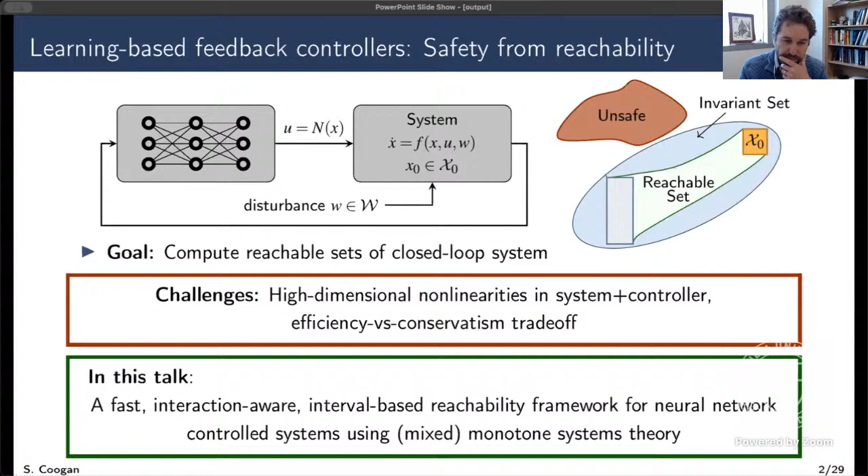This is a hardware platform in a collaborator, Panagiotis Tsiotras's lab here at Georgia Tech. This is a spacecraft mounted on a hemispherical ball joint, a very low friction hemispherical ball joint. It's actuated by air thrusters that rotate this spacecraft. The challenge here is that it's got very low actuation capabilities—the amount of force that can be applied to the system is very low. So to get the system to slow down and change direction takes quite a bit of time.

So we mounted a green laser pointer on top of the spacecraft. The safety specification is pretty simple to state in this case: you just don't want the spacecraft to ever point in the direction of the sun.

But it's quite difficult to anticipate where the spacecraft could go. If you have too much momentum and you're rotating, you may not have enough time to slow down before you violate the safety specification. So what we're doing in this experiment is constantly computing reachable sets of the system.

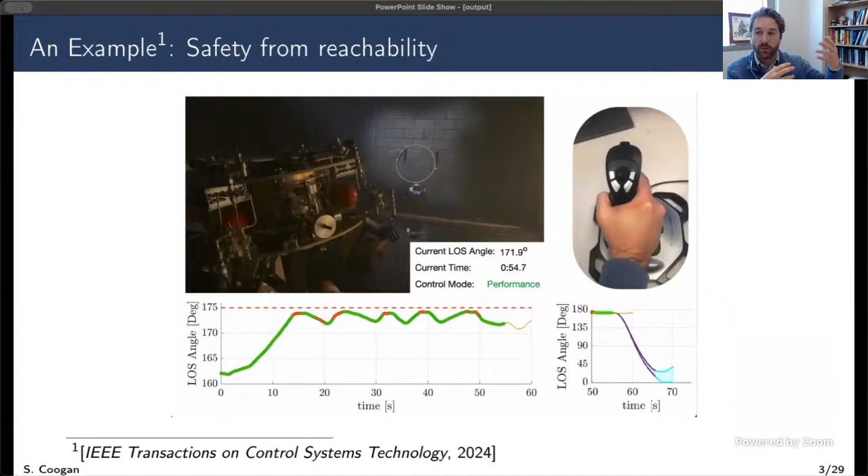We're constantly computing where the system could go over the next 10, 20 seconds, even subject to disturbances. We're making sure that under the worst case scenario of the disturbances, and the best case scenario of what we can do, we can avoid this unsafe set. And if we ever get too close to this edge of safety...

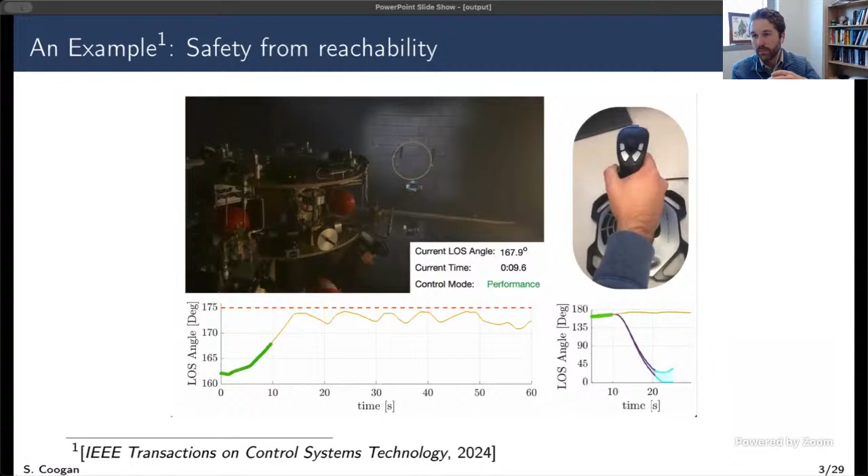We have to pull back and override the human's joystick inputs. The idea here is this needs to happen well in advance of actually violating that safety constraint, because we need enough anticipatory capability to slow down before we do that. So this is the high level motivation for why we're interested in these reachability problems.

Again, this is a complicated problem. This is a high dimensional system with some interesting nonlinearities that evolves on an interesting manifold. So there's lots of things we have to do under the hood to make this work.

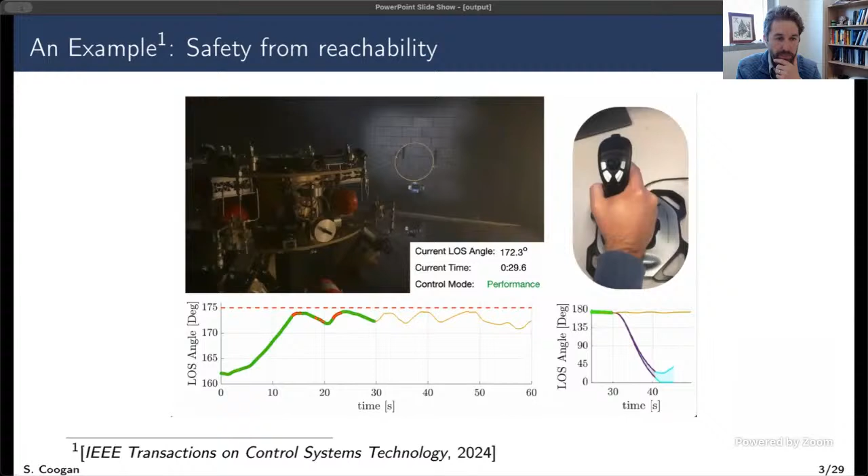Many of you might be familiar with this idea of what a reachable set is for a dynamical system, but let me step through it a little bit. In this case, we have a dynamical system, x dot equals f of x comma w. Right now, I'm not writing it with a control input, just a disturbance input.

Again, this could be because, for example, we've closed the loop with a neural network controller. We have some unknown disturbance. And the reachable set of this system characterizes all possible system evolution of the system.

For example, we have an initial condition x1, and we evolve the system over some horizon capital T. We might end up here at the state x1 of capital T. There's disturbances in the system, so even if I were to initialize in exactly the same place, I could end up somewhere slightly different. Of course, if I initialize somewhere else, I will generally end up somewhere else.

And if I have a set of initial states, shown here as this orange square, I could try to sample all of these different initial conditions, and I'll get some sort of sampling of the output. And then if I were to draw the exact correct envelope of all of these samples, this would be what we might call our time t reachable set.

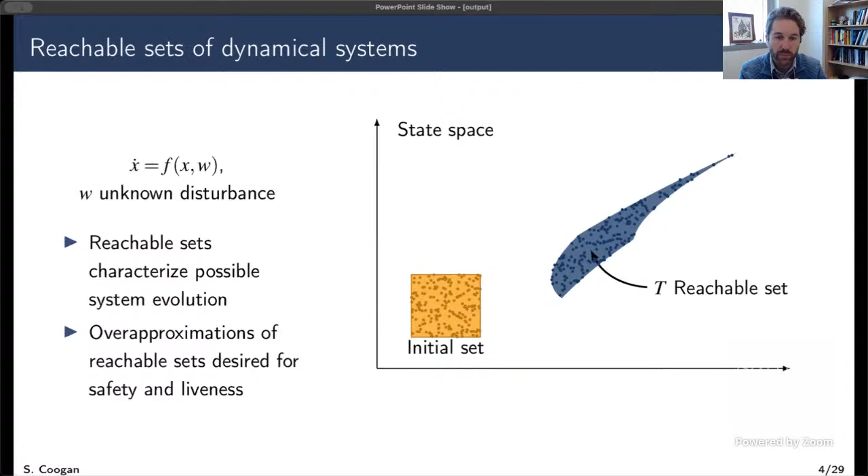And as I motivated on the previous slide, having access to this set is very helpful. It's a very important component in many different control applications, especially around verification and safety.

In general, it's very difficult to get a hold of the true reachable set of a nonlinear dynamical system. So what most of the work in the literature does, and what we will do also, is compute over-approximations of these reachable sets. We might be interested in over-approximating it with different set representations.

Here I'm showing an ellipsoid. And the reason over-approximations are generally the preferred type of approximation is because we can still do correct and sound safety checks, and even some liveness checks, with these types of over-approximations.

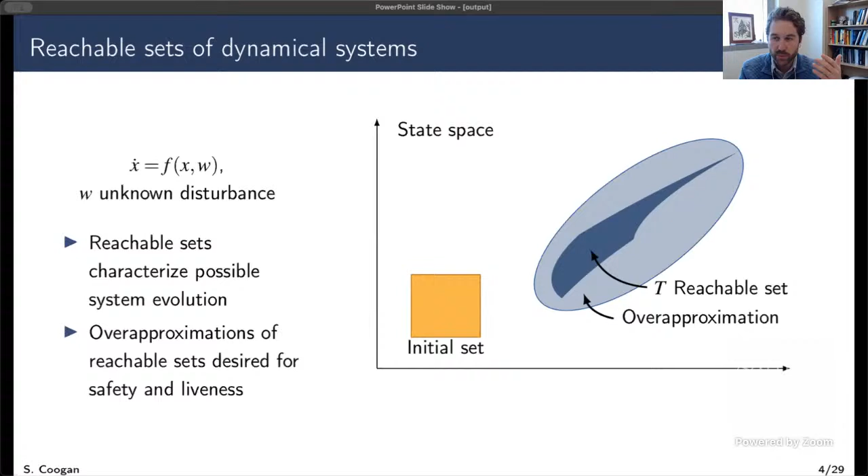For example, if I have a region of the state space that I know to be unsafe, with an over-approximation, if I make sure that over-approximation doesn't intersect the unsafe set, that's a sufficient condition for the real reachable set not intersecting the unsafe set.

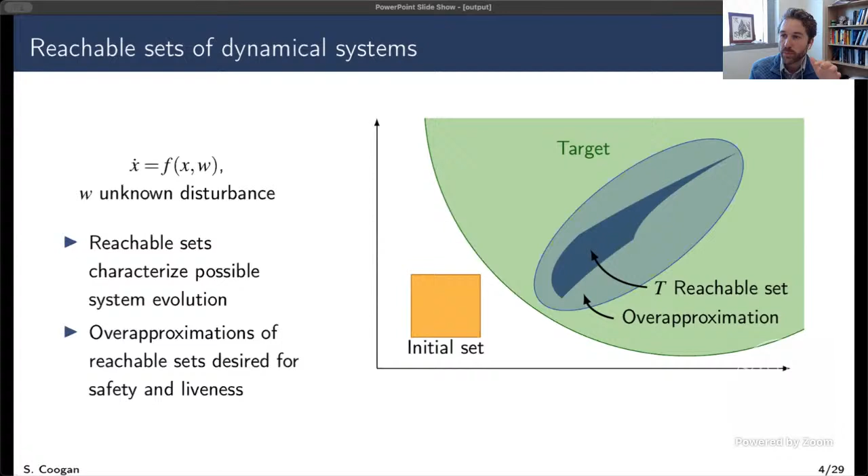Likewise, if I have a target set that I'm trying to reach, if I make sure that the over-approximated reachable set enters and eventually reaches that target, that's a sufficient condition for making sure that the system will indeed reach that target. So in general, not always, but in general, over-approximations are the right set representation for a lot of the verification and synthesis analysis we want to do.

Okay, so again, I told you that the challenge is computing reachable sets of these systems. We generally want to resort to over-approximations. Let me tell you about a particular class of systems where the exact reachable set over-approximation can be computed very efficiently, and in a certain sense, it's the tightest over-approximation.

So let me motivate that with this idea of a monotone dynamical system. A monotone dynamical system is a certain class of dynamical system that has the following property on sort of monotone ordering of its states.

It's kind of a strong condition, although there are many interesting real-world systems that exhibit this property.

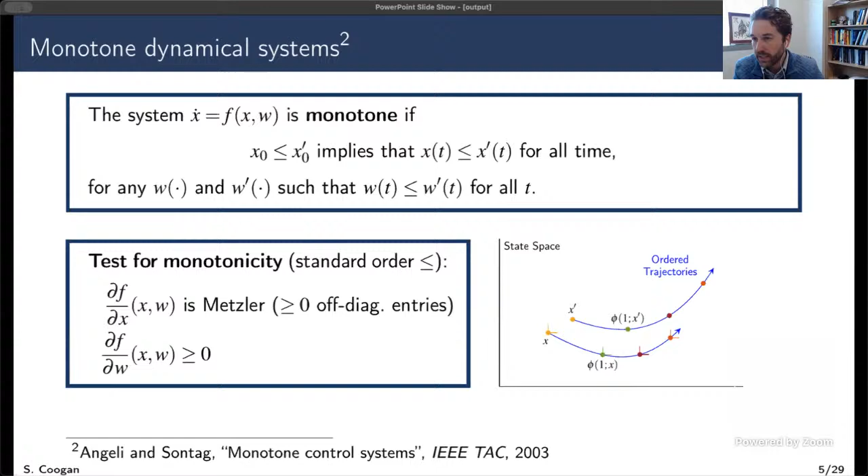Why is this class relevant for reachability analysis? Well, it's very easy to compute an over-approximating set for the reachable set. In particular, what I need to do is just compute two real trajectories of my system.

If I have a box of initial conditions, shown here with this pink rectangle, I take the lower initial condition, this x underscore, and this larger initial condition, this x overscore. I evolve those two trajectories of the system - those are two real trajectories of the system - and then I draw a box from the endpoints. That box contains the true reachable set of the system.

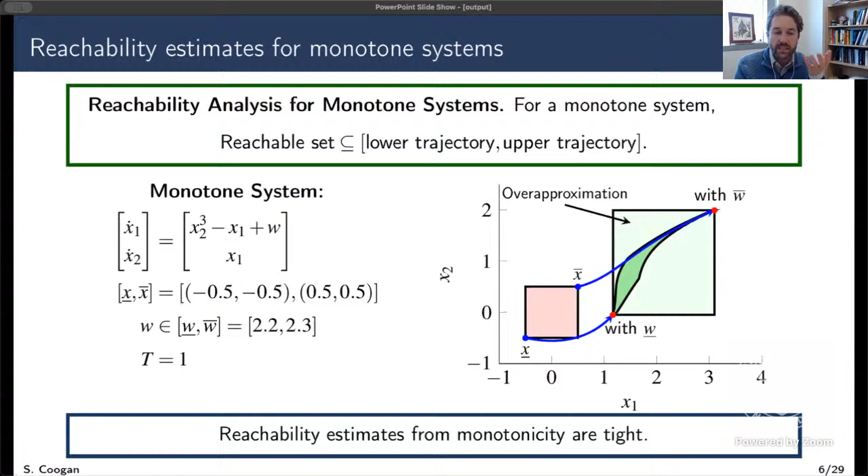And this is the property of monotonicity manifesting itself in this reachable set computation - that's what this picture shows. It also has this interesting property that this is the tightest box that contains the real reachable set. There is no tighter box that would contain the real reachable set. Of course, it's still an over-approximation - the real reachable set might have some interesting nonlinear shape to it, but this is the tightest over-approximating box for the reachable set.

So certainly not surprisingly, if my system is not monotone, I generally don't have this nice property where I just need to compute two trajectories of the system. Here's a very concrete example where I see that the real reachable set of the system extends beyond the rectangle I would draw from these two trajectories. So this is a very interesting property, but it is restricted to monotone systems.

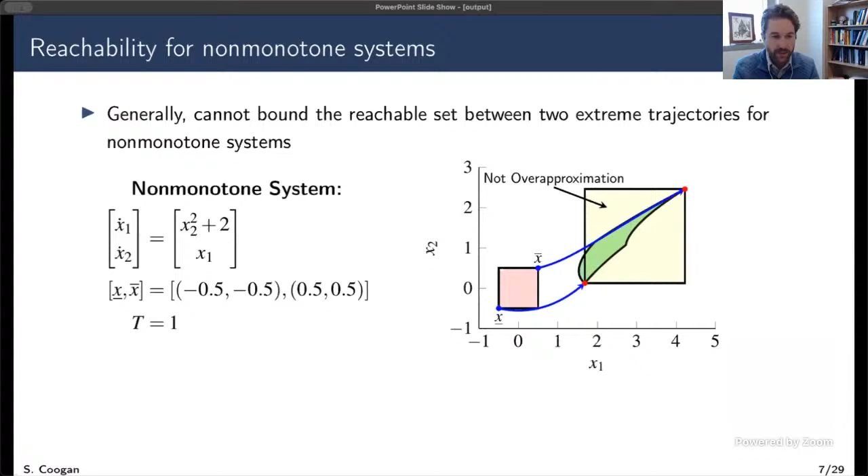So what we've been focusing on in my research group for a number of years now is how can we exploit this monotone systems property even on systems that aren't monotone? And it seems like a really good way to do that is to take our non-monotone system and embed it in a particular monotone dynamical system. We can do that using the theory of mixed monotonicity.

For the sake of simplicity, I'm going to assume my disturbance itself also lives in a box with w underscore and w overscore. Here's the mixed monotone approach to reachability analysis.

What you do is you have to find something called a decomposition function. You can think of it as two different functions, d underscore and d overscore. These decomposition functions take in twice as many arguments as the vector field. So if the vector field takes x and w as its arguments, the decomposition functions take in two copies of something with the same dimension as x and two copies of something with the same dimension as w.

It has this interesting ordering property where if I substitute in the same arguments, x and x, repeated in the first two arguments, and w in the second two arguments, I get this sort of ordering relationship between the vector field and the decomposition function. This tells you that the decomposition function somehow sandwiches the vector field of your original system. Ideally, you want to try to get equality in this first requirement, which you can do sometimes.

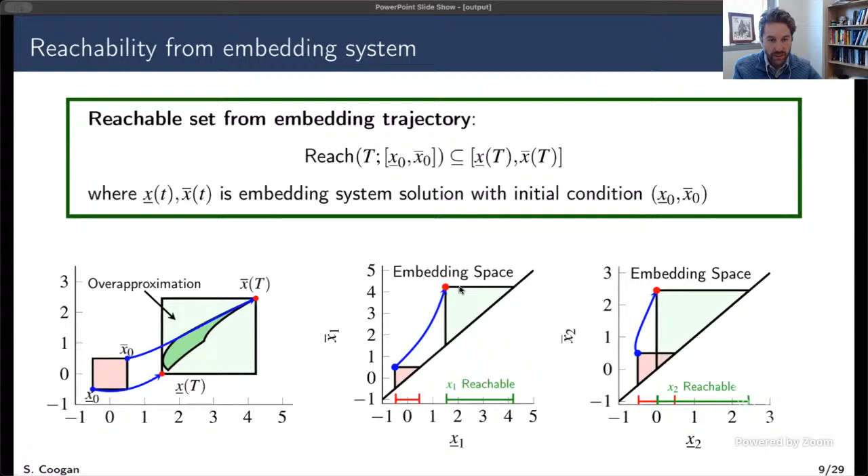Okay, you can do more than just compute reachable sets using the monotone embedding system. Because we're thinking this is a dynamical system, we can now think about stability in this higher dimensional space. And there's this really interesting connection between stability in this higher dimensional space and forward invariance in the space of rectangular reachable sets.

So in a paper from a few years ago, we showed that if you can find some point in this higher dimensional space where the vector field points in a certain direction, so it's got this non-negativity with respect to the southeast order. For example, a special case would be if you happen to find an equilibrium point where this is actually equal to 0, then you have this very interesting property. The rectangle that corresponds to the trajectory initialized at this point is robustly forward invariant for every point in time in the future, including at time 0.

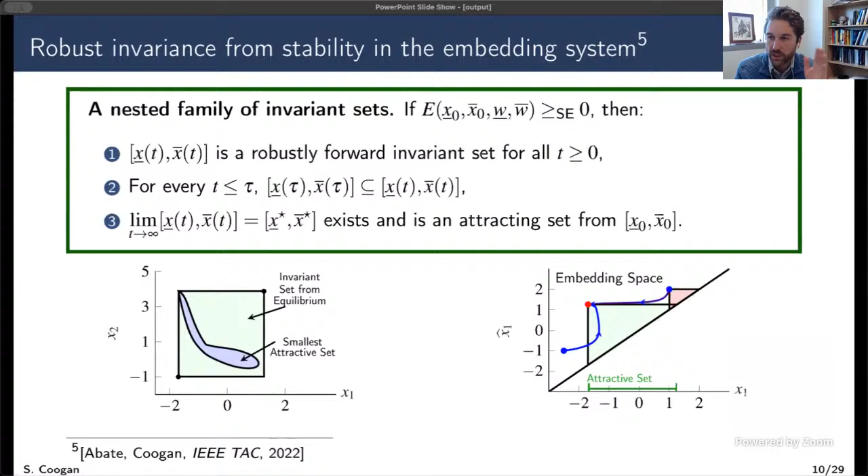These reachable sets sort of nest as you go along, and the limit exists. So what I mean is, if I were to evolve this embedding system, it would shrink to some rectangle, and that rectangle would be some sort of approximation of the smallest forward invariant attractive set for the initial box x naught, x naught. So this lets us compute these forward invariant reachable boxes for these systems by thinking about equilibria and directions of the vector field in this embedding space. There's this really clean connection between reachable set theory and stability theory of the embedding system, and this is something we'll exploit later in this talk as well.

So to summarize, and again this is a problem we've been working on for a number of years now, this mixed monotone approach is extremely fast. A single trajectory of this embedding system bounds the reachable set of the original system. We've swapped out this uncertain disturbance set, looked at its extreme corners, and now that lets us think about a deterministic embedding system as well. So I don't really have to think about propagating disturbance sets either. It's just a single trajectory of an ordinary differential equation. I can literally go call ODE 45 or some other ODE solver, and get these trajectories.

It's also very scalable, mixed monotonicity. It scales to high dimensional systems. For example, if I find an asymptotically stable equilibrium in the embedding space, this gives me an attractive and robustly forward invariant set for the system, regardless of the state space dimension.

I guess the downside of mixed monotone systems theory is it's got this over-approximation flavor to it. I'm computing over-approximations of the reachable set. So while all of these results are sound and sufficient, they could be conservative. And really, to be honest, the conservatism is a big piece of the challenge of monotone systems theory, and it's where we've been focusing a lot of our effort, especially in the past 18 to 24 months, tackling this conservatism.

So here's some recent research objectives we've been focusing on in this space, and I won't be able to talk about all of them today, but I'll address them bit by bit. The first is totally automating this decomposition computation, using the theory and tools of interval analysis. Early on in our exploration, we thought about this very analytically, and we wrote down decomposition functions analytically. In the past year or so, we've totally automated this, and we can use interval analysis theory to automate computations of entire families of decomposition functions.

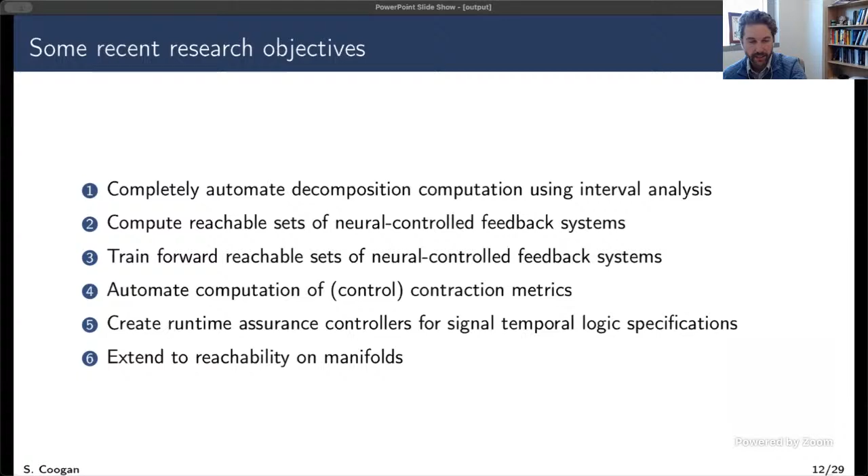So let me talk a little bit about the computation side, thinking about these automated decomposition functions. Let me briefly tell you what an inclusion function is. If I have a function g that in general maps from Rn to some other dimension Rm, an inclusion function for g, we write it as this pair, capital G underscore and capital G overscore.

And what it does is, if I give you this box, it over-approximates the function evaluation on that box. That's how you think of this inclusion function. Mathematically, if I were to evaluate g underscore at x and x hat, these are sort of the corners of the box, it lower bounds the real function evaluation for any point z contained in that box, x, x hat.

So of course, this is not new theory, understanding how to compute inclusion functions, and there are natural ways to do this. If I write down an equation I can decompose it into its constituent functions and operators, and extend all of this to intervals and get certain kinds of inclusion functions. So this is not new. Surprisingly, perhaps for us, there did not exist a good toolbox for doing this in Python.

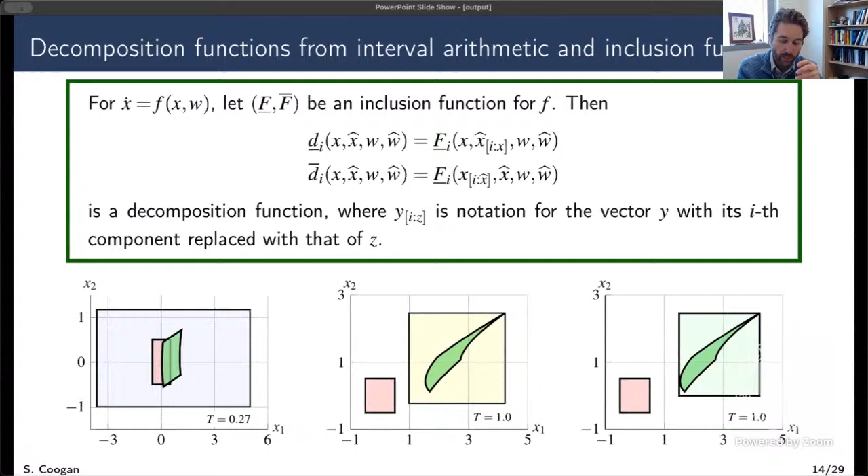Okay, so now let me talk about this first problem, this reachability of neural controlled systems, a problem that I brought up on slide 1. Just to recap the setting, I have a dynamical system, and now I might superscript it with OL for open looped. This is a dynamical system, and it has a control input U, and a disturbance input W. And I'm going to close the loop with some neural network controller. In the next few slides, I'm going to assume this is given to me.

Somebody else has trained a neural network controller, and our job is to make sure that that neural network controller does what it's supposed to do from a safety perspective, for example, from an obstacle avoidance perspective. So what I can do is write down the closed loop system where I substitute in the neural network for the control input. Now I have this closed loop dynamical system, but it has this high dimensional nonlinear neural network embedded into it. So our goal will be to compute reachable sets of this closed loop system.

We're going to do that in the following way. First, we'll use an open loop decomposition function for our original system, using our usual tools to compute this decomposition function from an inclusion function. Then we're going to get our hands on an inclusion function for the open loop controller, using existing results from the machine learning community, where they have a growing suite of tools for over-approximating the image of a neural network.

If I give you a set of inputs to a neural network, there's a growing number of tools that overestimates the output set of that neural network. We're going to use a particular type of over-approximation in the next few slides. Then, once I have these open loop decomposition functions and this inclusion function, I will construct a particularly careful embedding system, and then evolve that embedding system to get an over-approximation of the set.

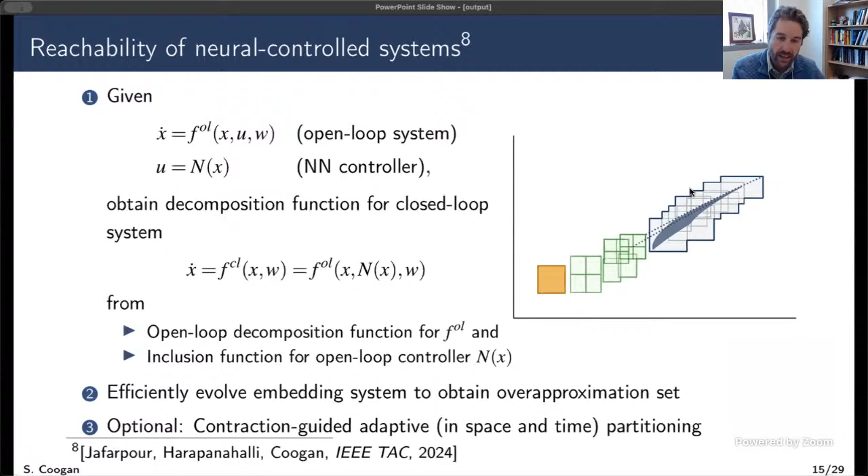There's an extra thing you can do that I'm not going to talk about in this talk, but that we did talk about in a CDC paper recently, which is I can do some very clever partitioning as well, based on how fast these reachable sets are growing. That's based on this contraction metric, and I can try to be very careful with how I partition the state space in both time and in space, which I think is an interesting problem.

Okay, so let me show you the results for this and how this works. Again, the challenge here is blending this decomposition function for the open loop system, which I told you how to compute, with these inclusion functions for these neural networks. For example, we're using alpha beta crown. I cut a couple of the slides on this because they were a little technical, but we can find them if there are questions about this.

What we're basically doing is finding these affine under and over approximations, these local affine approximations of the neural network. We're using known tools for that in alpha beta crown, but we're being very careful about where we're evaluating these affine over and under approximations, and very careful to incorporate these affine approximations into the decomposition function in the open loop dynamics, so that I don't accidentally compound the conservatism too much. I really want to make sure that if there are stabilizing effects in the controller, I'm accounting for them in this closed loop embedding system.

So here's a demonstration of how this works. This is a dynamical system with 4 states, a kinematic bicycle model. It's got position in the XY plane, PX, PY, a velocity V, and a heading angle phi. The input goes through a steering angle, and you can see there are pretty complicated nonlinearities here: cosine, sine, this arctan function enters in a pretty nonlinear way.

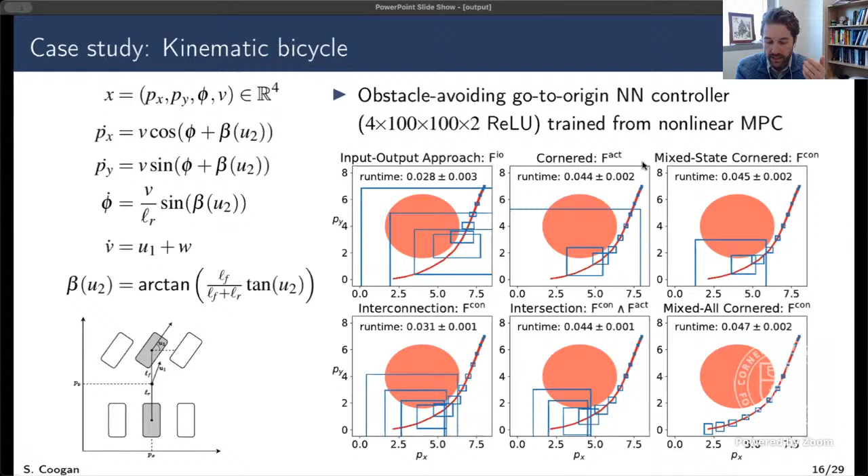This is really the power of this mixed monotone systems theory—this computational efficiency. That was a 4-dimensional system. I think it's very interesting to think about how this would extend to higher dimensional systems.

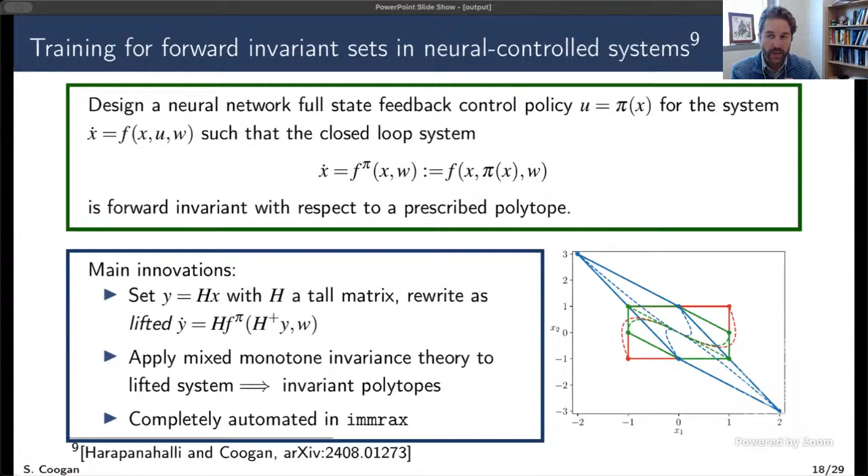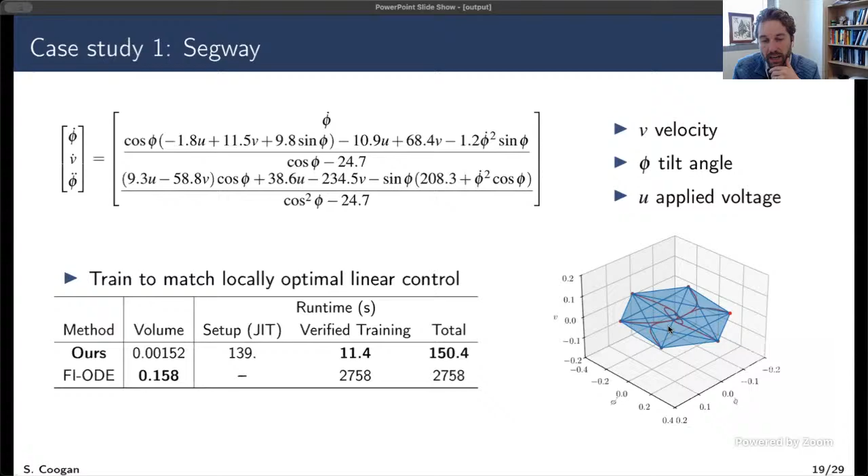That's the polytope showing, from several initial conditions, we do indeed converge to the origin for our system. Here's another case study, very similar to our platooning example I described a few slides ago. We tweaked it a little so our forward invariant sets didn't grow as the platoon size increased, with some increased connections between the vehicles. The point is that with our method, we went from 4 vehicles to 28 vehicles.

So we had our state space. We also changed the dynamics a little bit. These weren't bicycles, these were sort of double integrator vehicles with some saturation on the control input. So our state space went from 8 to 56 in this example.

There's this lifting operation, and so that increases the state space a little bit. But the point is that our training method is able to work here, and we can train polytopes for these pretty high dimensional systems, right? This is a 56 dimensional system or an 84 dimensional system, depending on how you think about it.

And we can do this pretty quickly, just on the order of minutes, using this IMMRAX toolbox. And this just shows you the polytopes we're finding for the system projected to an individual, to 4 different vehicles.

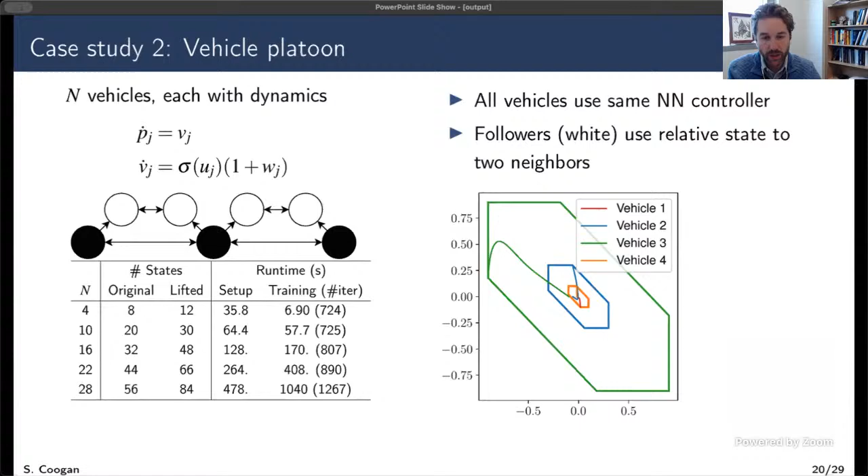Okay, so that's sort of our work on neural network controlled systems. We've been using a lot of these same tools in theory for more complicated safety specifications. So you can think of neural networks as bringing a layer of complication to the control strategy. Another angle that we're very interested in is bringing a layer of complication to the safety requirements, right? And possibly bringing both, right?

So I'm not going to give you a talk on signal temporal logic. If you've seen these, you can do half a talk just trying to summarize what signal temporal logic even is. I think for the purposes of this talk, it's sufficient just to understand that signal temporal logic lets you formally specify things that are more complicated than just avoid that obstacle or reach that goal region.

So for example, you might have some sort of hazard region and you want your state trajectory to avoid it, but it's kind of a soft avoidance. You want it to avoid it for at least n consecutive time units in any rolling window of W time units, right? So maybe it's a temperature source and you can withstand high temperatures, but only for a limited amount of time, and it takes a certain amount of time to cool off, something like that, right?

And the point is that I could just try to avoid this region, but that might be too much. So I might want to let my system evolve into that hazard region, but I wanted to satisfy this requirement, this N and W requirement, right?

So the point is, first of all, I can write this down formally using this temporal logic syntax, right? And I won't go through the syntax in too much detail, but the point is that this syntax is built from these predicate functions. So we can think of predicate functions as sort of being whatever's defining the obstacles and goals in your state space, right?

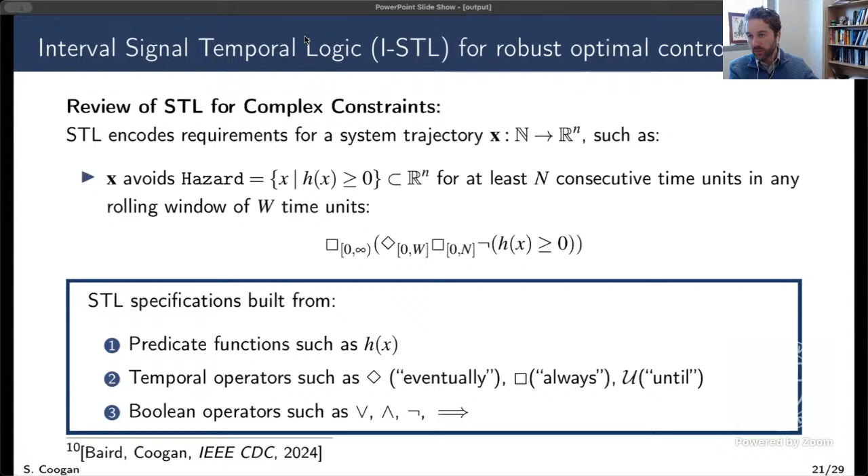What we've done in this paper and a couple papers is that we've been extending this to deal with intervals so that we can then couple them with our reachable set computations, right? And so let me try to briefly explain what we've been doing with this, what we call interval signal temporal logic. So it's both we're proposing a kind of extension of signal temporal logic, and then we're also proposing the correct computational framework for dealing with this extension.

So just at the definition level, this extension simply allows us to have interval valued signals, right? So instead of saying here's the trajectory of your system over time, we can say here's the intervals that your system was in over time, right? And we can also have interval valued predicates. So maybe instead of saying here's the exact location of the obstacle, we can say here's sort of a set where your obstacle is defined by maybe intervals on parameters of some function or something like that.

And then with this definition, we can define what's called an interval robustness metric. This tells us if we satisfy our specification and by how much we satisfy the specification. And it's now given as an interval because, depending on exactly where we sample from this interval, we'll get different robustness values. So now we have this interval robustness semantics.

And the other really important feature of this is because we're leveraging this idea of interval arithmetic inclusion functions, because we're leveraging our computational tools that we developed with NP interval and with IMMRAX, we can do the verification and synthesis algorithms, right? So there are known verification and synthesis approaches for regular signal temporal logic, and we can apply them using our interval extension with essentially minimal changes, both from the coding level and from the computation level.

If you wrote your code using some of these known STL toolboxes, and you just imported our interval extension of NumPy, and our slight modification of these signal temporal logic toolboxes, you can, with very minimal changes to your code, suddenly work with uncertain systems, with intervals, with uncertain obstacles as well. Because we have intervals, the computation time essentially doubles, since we have to deal with lower and upper extremes of everything, but that's not too much of a price to pay. No matter what computation time you were willing to pay initially, in this uncertain setting, you're paying roughly 2x. There's a little extra overhead, but it's roughly twice as expensive.

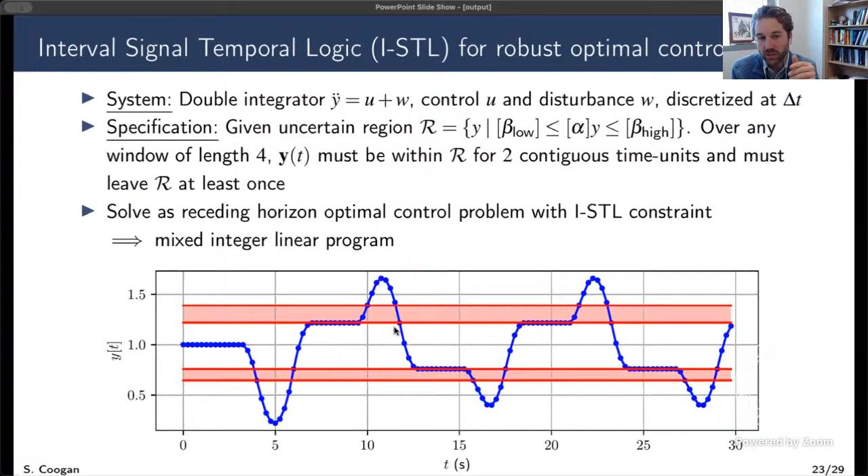This is just a toy example. Here's a video where we apply this to what I think is a much more interesting system — a blimp in our lab. We model it with 12 state dimensions, but we're just projecting down to 2 state dimensions here.

The specification in this video is similar to the one on the previous slide. Anytime the blimp enters this blue square in the center of the room, it can do so for about 3 seconds, but then it needs to leave for 3 seconds. So that's the safety specification. The nominal control objective is just to drive around in a circle as fast as you can, but it can't clip the corners too much, because that would violate the specification.

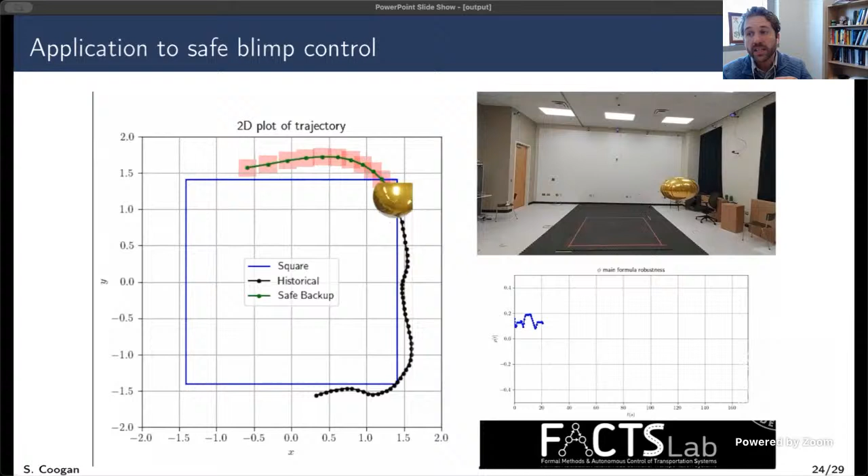So what we're doing is we have this implemented as what we call a runtime assurance mechanism. It's constantly computing whether or not it can satisfy the safety specification. It's computing reachable sets of the system using mixed monotone systems theory. It's checking satisfaction of my specification using interval signal temporal logic, and it's constantly making sure that it's not going to violate the specification. And if it ever is at risk of violating the specification, it will override that control input, and that we get by solving a mixed integer linear program online.

And kind of the other part of this video is I can do that fast enough, these mixed integer programs for signal temporal logic with some kind of clever warm starts and things like that. I can do that fast enough that I can do that in the control loop. So I'm getting verifying safety online. And even if my clock were to time out, even if my mixed integer linear program were to fail, the way we have this whole pipeline structured, the way we have this whole optimal control problem structured, I always have a known safe control input from the previous computation step. So it really is verified safe as it goes along.

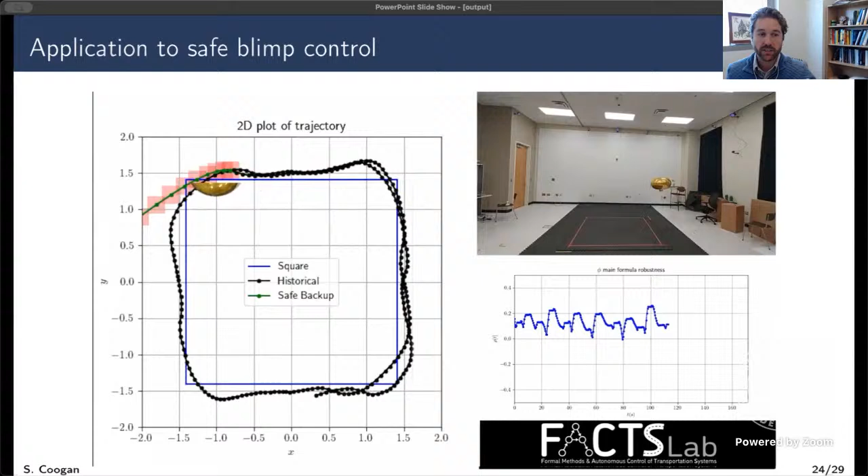And as you see, it's doing exactly what we would want it to do. It lets the blimp clip these corners of the safe set, but not too much. And it makes sure that the system is always safe. The red boxes are sort of these reachable sets that it's computing over time as it goes along with this set. Okay, so let me keep moving.

Let me just very briefly highlight some other things we're doing with this basic computational framework, these basic computational tools. One of them is trying to go to manifolds. This came out of a real-world experience. We were trying to, again, you saw that spacecraft example from the first couple slides. We've been trying to take some of this theory to quadrotor control. And there, if you're familiar with any of this, even on the blimps, but we were sort of able to get around it a little bit on the blimps, it makes a lot more sense. You have to really model the orientation of these things as manifolds, right? As SO3 and as quaternions or whatever, right?

And so, you can try to pretend that these are Euclidean spaces, but these methods tend to get pretty conservative pretty fast when you do that. They're correct, they just tend to be conservative. So what we've really been trying to think about carefully is what is the correct numerical way to do these reachable set computations on these types of manifolds, and particularly groups, motivated by these kinds of applications. And what we've done is we've been leveraging tools from geometric numerical integration. These are tools designed for solving ODEs on Lie groups, and we're using these same insights to solve for reachable sets on Lie groups.